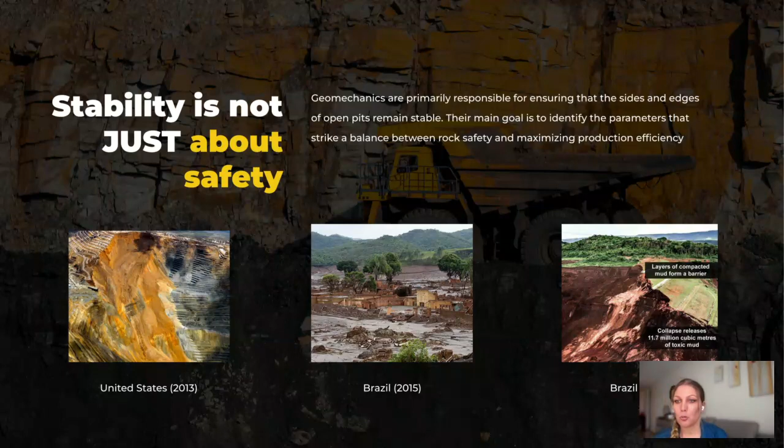Basically, the stress in the soil that makes up the slope depends on how heavy the rocks are, and anything else like buildings or machines sitting on the side of the slope.

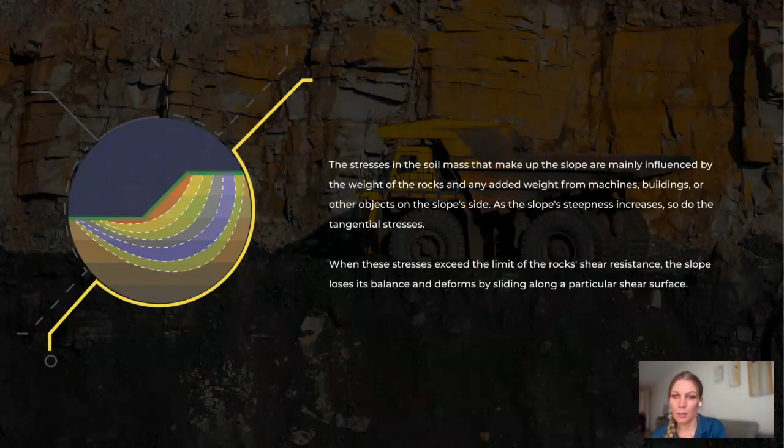When the slope gets steeper, the tangential stresses go up, and if they go too high and exceed the shear resistance limit of the rocks, then the slope goes out of balance and slides along the specific surface.

So when the height of the ledge increases, we need to make sure the slope stays stable by reducing the angle of inclination.

The slope height and angle are affected by natural factors like how strong the rocks are, how fractured and layered they are, the orientation of cracks and layers in relation to the slope, as well as other things like groundwater level and technological factors.

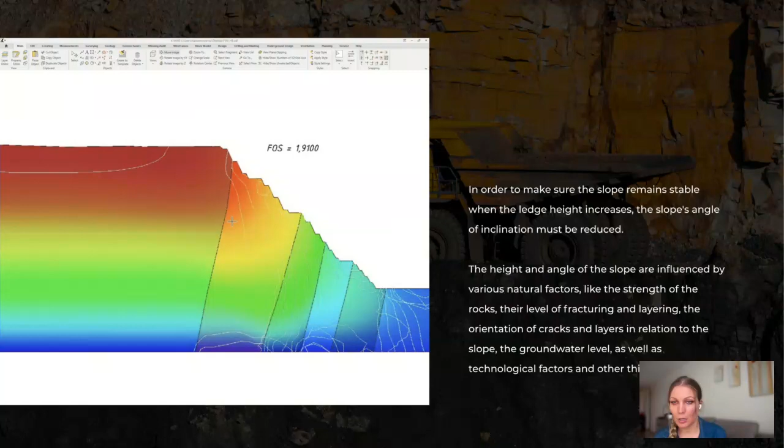That's why we need to do geotechnical surveys to assess the stability of existing slopes and calculate laying angles for planned objects. Even though the rocks can be complex and hard to work with, we can still calculate the slope elements with minimal errors.

When we determine stability, the composition of rocks that make up the sides is what is most important. If the rocks are homogeneous and possess constant physical and mechanical properties, we can use analytical dependencies to evaluate stability.

However, if the sides of the pits are made up of layered rocks of varying thicknesses and orientation to the horizontal plane, and atmospheric precipitation affects the physical and mechanical properties of the rock mass, along with the additional load from heavy mining and transport equipment, then the calculation models become much more complicated.

In these scenarios, closed analytical dependencies are no longer applicable, and researchers must turn to numerical or digital models to assess the stress-strain state of pits and dumps with various shapes and compositions.

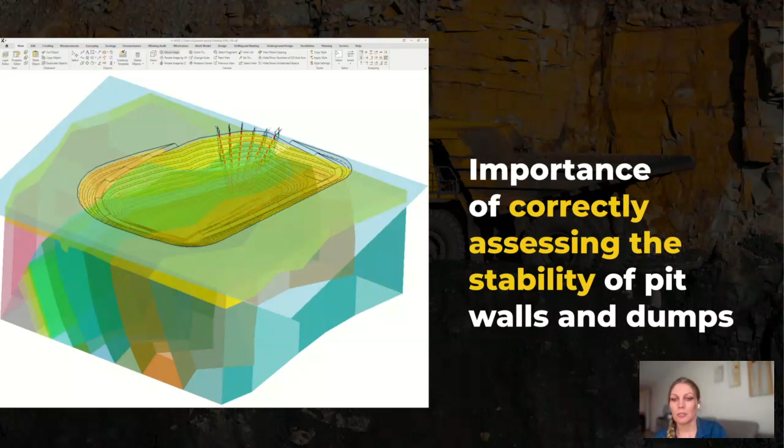These numerical models allow us to evaluate pits and dumps composed of rocks with arbitrary structures and variable physical and mechanical properties. As far as K-Mine software, our tools allow users to manage rock masses, helping them tackle complex issues such as calculating stability or deformation in open pits.

Geomechanics in general is a multidisciplinary field, as it includes mechanics of deformable medium, geology, hydrogeology, geotectonics, engineering geology, and seismic events impact. In mining geomechanics, we utilize various methods to determine slope stability by computing the stability coefficient.

One of the useful tools in identifying the sliding surface present within the structure is the theory of limit equilibrium, as it allows us to ensure safe and stable mining operations.

Holding and shearing forces also play a significant role in geomechanics, as we address them through the application of algebraic addition or polygonal forces techniques. These methods enable us to deal with challenging rock mass management issues and maintain the stability of mining operations.

We utilize various methods to determine the slope stability factor while also creating graphical representations of prisms that may collapse. To get started, we require some initial information such as physical, mechanical, and strength properties of the rocks in the area of interest, the structure of the ledges located at different elevations, and the calculation area boundary.

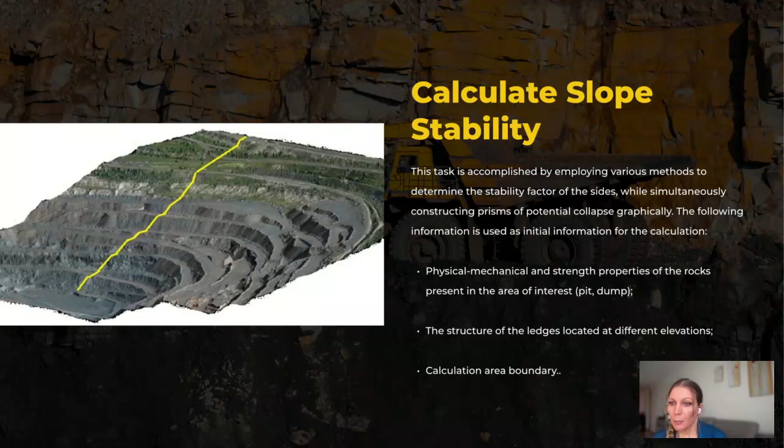So let's talk about each of these methods in detail. The method of algebraic addition of forces involves graphically displaying prisms of possible collapse that help us determine whether a slope is safe or not.

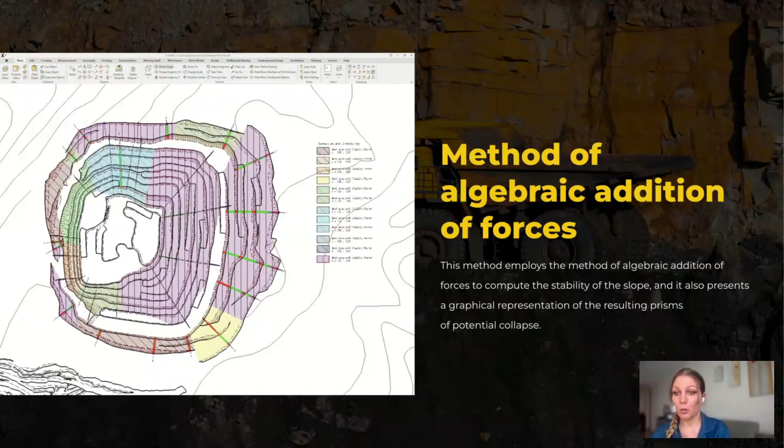To use this method, we need to specify or select the physical and mechanical properties of the rocks, and then divide the calculated prisms of potential collapse into a number of smaller prisms. Additionally, we can utilize the filter that takes into account seismicity by enabling the appropriate flag.

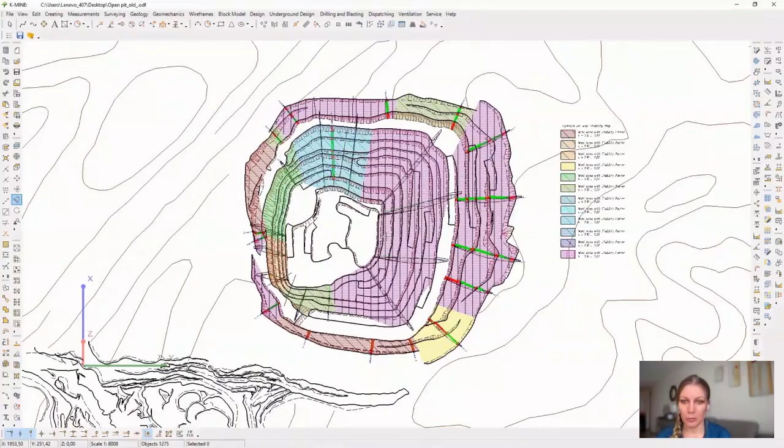In addition to the safety factor, we can also calculate the slope angle for a given stability factor. This information is incredibly valuable because it allows us to design and implement slope stabilization measures that are effective and efficient.

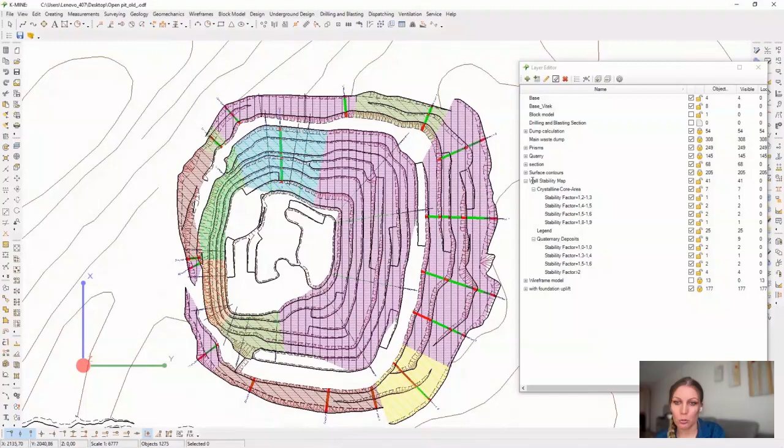Overall, the algebraic addition of forces method is an essential tool in the field of slope stability analysis because it provides us with valuable insights into slope stability as well as ease of use, making it a crucial technique for anyone involved in mining projects.

Next method is the calculation method with foundation uplift, and it's used to determine the stability of slopes in areas such as dump sites or tiers, taking into account holding and shear forces caused by foundation uplift and plantar deformation from a weak foundation of high power.

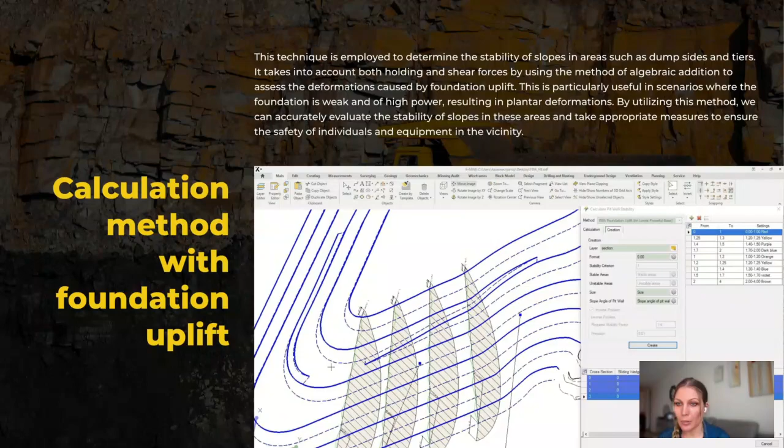The calculation of stability starts with the search of the most stressed sliding surface in the rock area. Then an iterative construction is carried out from the minimum possible sliding prisms that are limited by the sliding surface, approximated by 3 arcs of circles.

To perform calculations using this method, we need to enter rock properties for the foundation and the upper layer separately by selecting the Set button in the corresponding calculation field. Then the calculation is performed using 2 selected polylines drawn along the normal to the analyzed slope.

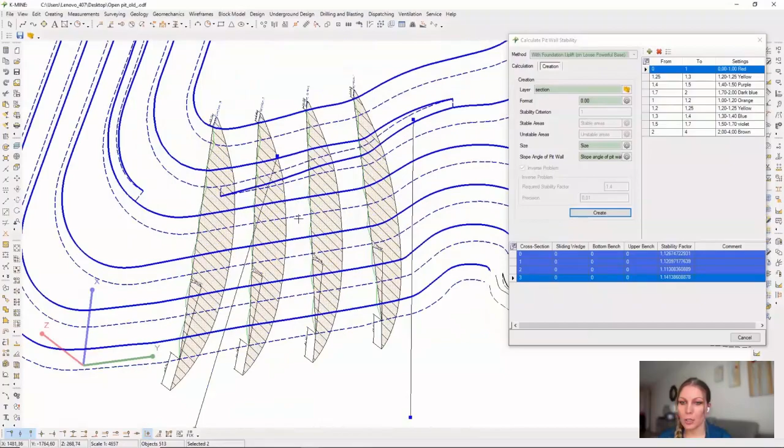The result obtained while calculating slopes on a weak foundation covers only the slope from the first lower edge, which is basically the boundary of the rocks of the weak foundation by default, to the last upper edge that intersects the calculated profiles represented by a polyline.

This method is incredibly useful in accurately assessing the stability of slopes and ensuring the safety of individuals and equipment in this area.

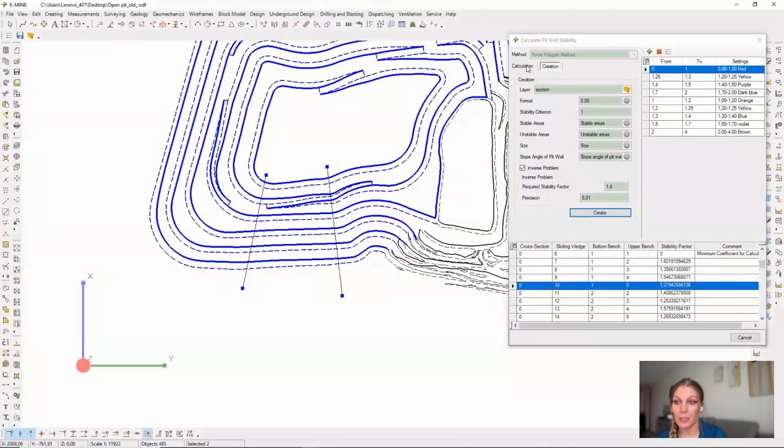The next method is the force polygon method, and it's another way to calculate stability in a homogeneous area by taking into account shearing and holding forces through vector addition.

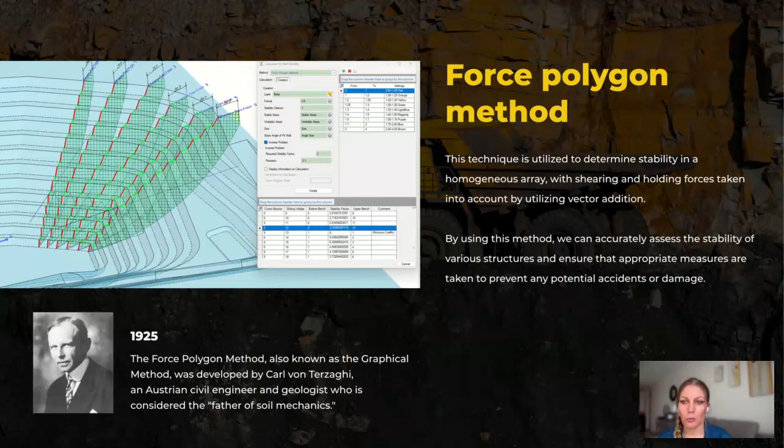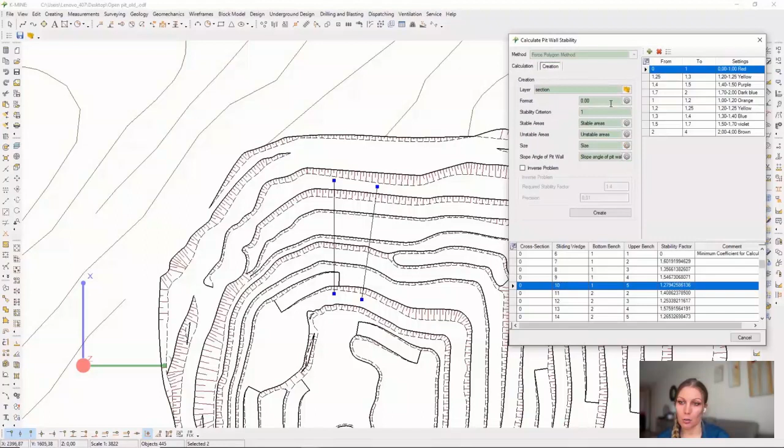Once you choose this method, you need to enter data about physical, mechanical, and strength properties of rocks, similar to algebraic addition of forces. Apart from typical stability calculation, this technique considers hydrostatic weighing under watered slope conditions for dispersed unbound rocks. To account for hydrostatic weighing in the calculations, we have to indicate the layer in which hydroisohypses of the groundwater level are located in the upper boundary of the aquifer field.

This method is very helpful in assessing the stability of various structures and ensuring the safety in mining projects. It's essential to use this method to avoid potential accidents and damages that occur due to unstable structures.

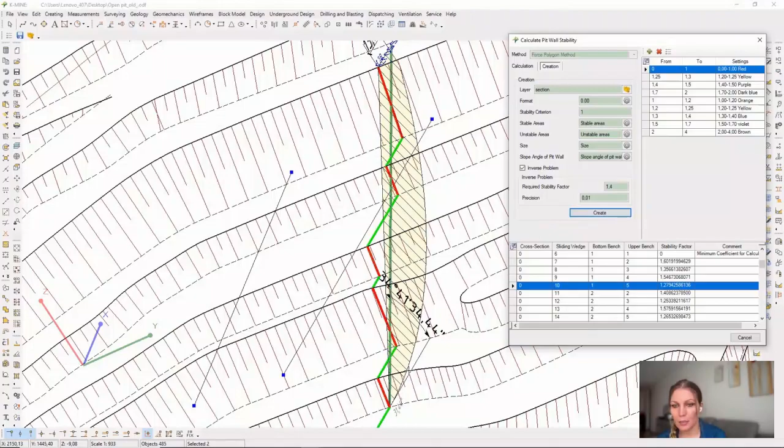The next method is the force polygon method in anisotropic medium, and it's a tool that is used to calculate the stability of a heterogeneous massif, which takes into account the shearing and holding forces by using the vector addition of forces.

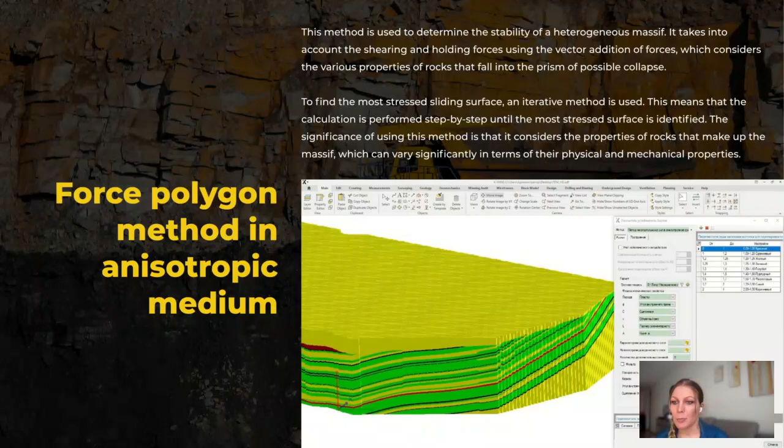This method considers various properties of the rock that fall into the prism of possible collapse, and the search for the most stressed sliding surface is carried out by an iterative method.

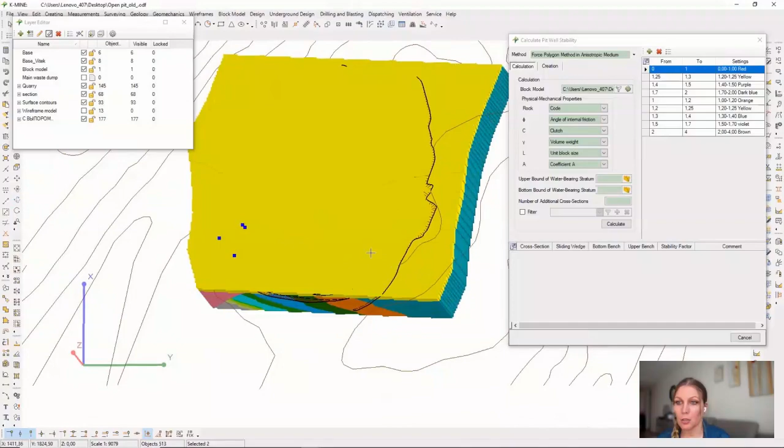What distinguishes this method from calculating stability in a homogeneous massif is that the rock properties needed for the calculation are automatically extracted from the block model, which is entered during its creation.

Furthermore, taking into account seismic impact, water slope, and the presence of weakening surface is done in a similar way to the polygon of forces method in a homogeneous medium. The construction, output of information about calculation, and calculation of the inverse problem are performed similarly to the polygon force method in a homogeneous medium.

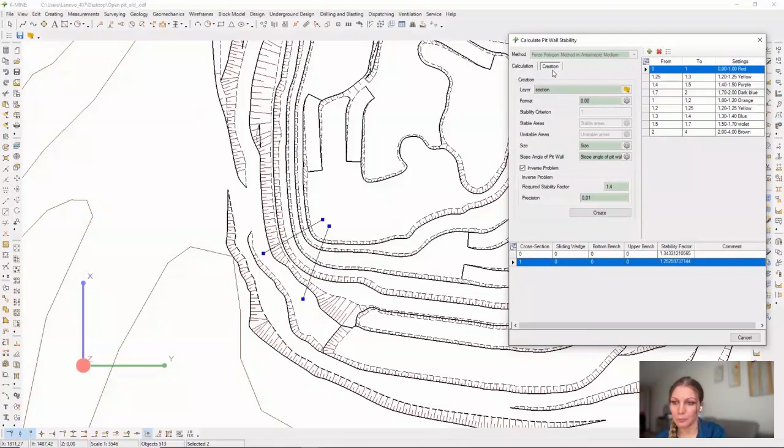And the last method is the task calculate FEM stability, which stands for finite element method. It's used to determine the stability factor and stress strain state of slopes, pit walls, and dumps.

This command makes use of the finite element method, which is a numerical technique that involves dividing the area under analysis into a finite number of sub-areas or elements. This helps in carrying out an elastoplastic calculation. To determine the slope stability factor, we use the strength reduction method, which involves finding a stable solution to the problem while simultaneously reducing the strength

characteristics of the rocks in the massif. So in order to begin the task of calculating FEM stability, it is necessary to construct a geological section using a surface object with a double fill and build polylined objects to act as boundary conditions.

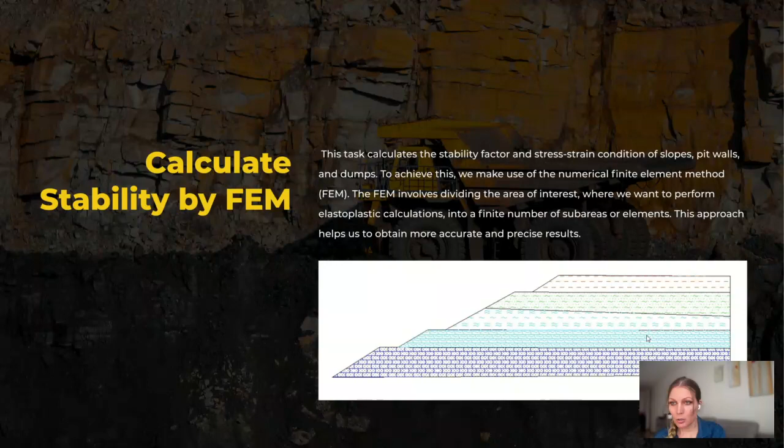So now we can explore the geomechanics model in K-mine in a more practical context. Our objective is to optimize the angle of inclination of pit wall to achieve an economic benefit. So to start, we'll determine the current stability coefficient and then proceed to optimize it.

First of all, we make use of the initial design coordinates of a conditional open pit, as well as the framework of the open pit and the rock formations that contain the mineral deposit.

The stability calculation, which utilizes FEM, is performed section by section. This allows us to utilize the create section tasks to obtain a slope section that takes into account the mining location and the rock formations.

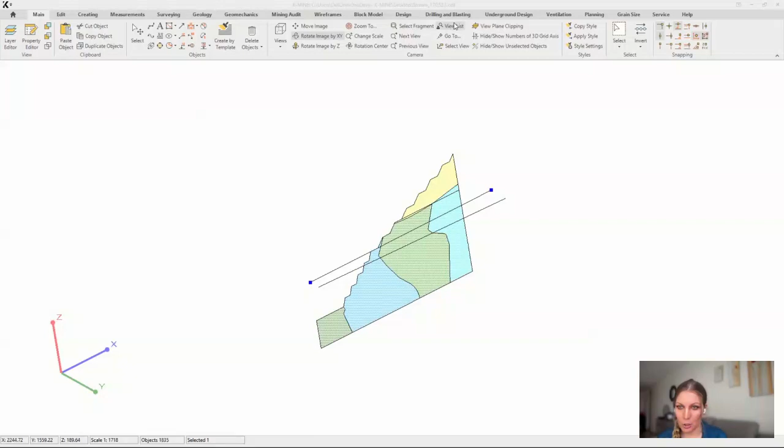We trim the superfluous portions of the sections and switch to the working view. And then we initiate the FEM stability calculation task.

Subsequently, in the task menu, we should upload the rock list, define their characteristics, and establish the association between the surfaces on the section and the rocks mentioned in the list.

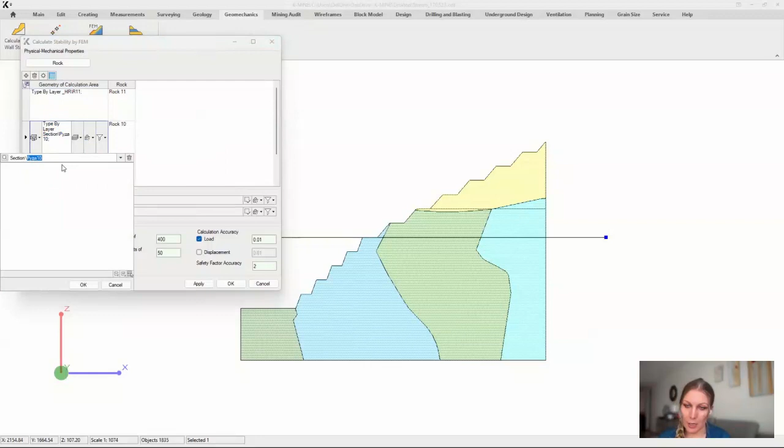Now let's talk about the limiting factors that we need to consider. Once we've taken those into account, the next step is to create a grid of a certain size, determine the number of iterations, and set the required accuracy. After that, all we have to do is hit the apply button, which within a few seconds will have our results.

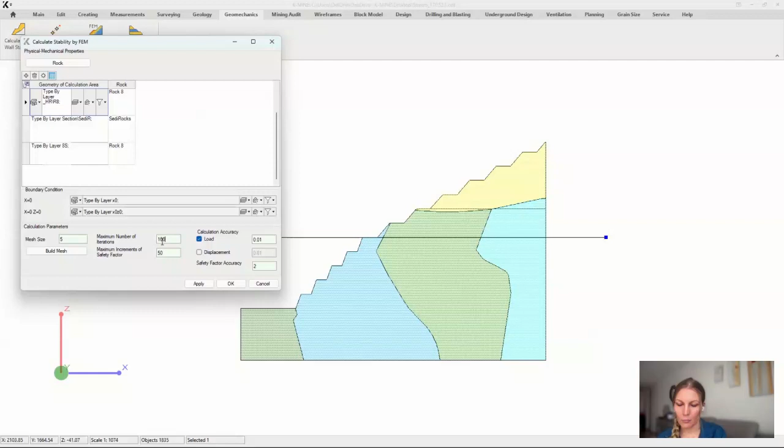So each result we get comes with its own stability map, which has its own legend and stability factor. Let's look at the results we obtained so far.

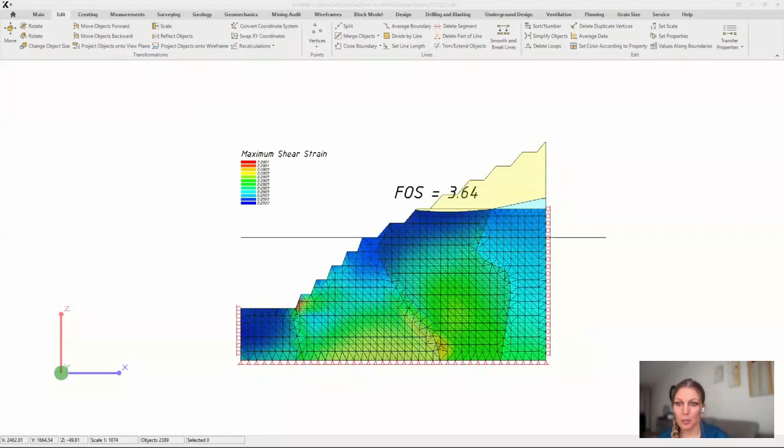To perform the task, we need to do it in two stages. First, for the stable rocks, and then for the weak overburden.

Now let's perform a comparable calculation for the overburden. With some parameter reconfiguration, we can easily run the calculation again.

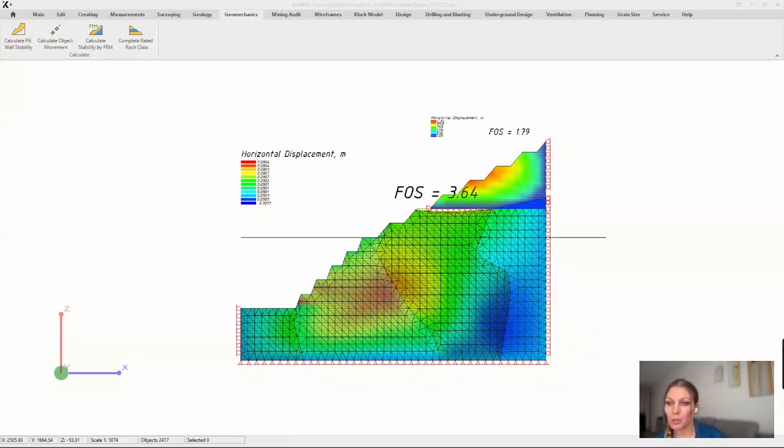The stability factor for the overburden is 1.79, indicating that this section is not extremely stable. While the coefficient is considered normal, there is no need to reduce it at this time. However, we can optimize the factor of 3.64 for the rock formations, which presents an opportunity for improvement.

To achieve this, we can utilize the calculate slope stability task for our section. We'll pick the prism that connects the zeroth and sixth ledges from the result list, and then we'll input the required safety factor, like 2.7, in the required stability factor field and run the calculation.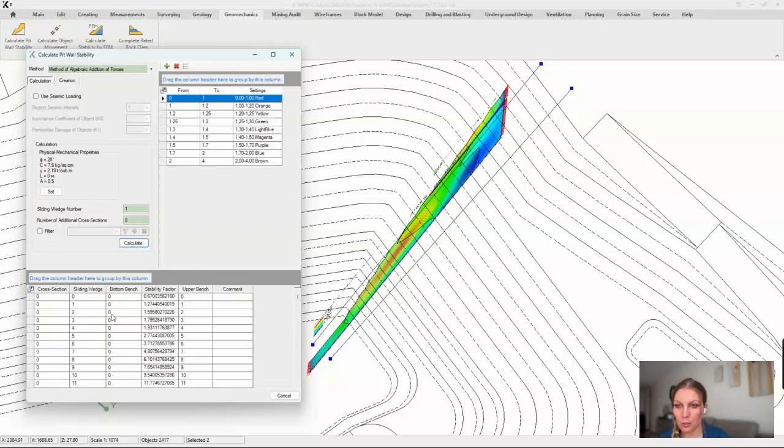Using this approach, we arrived at a stability factor of 3.7, which closely matches the factor derived from the FEM method.

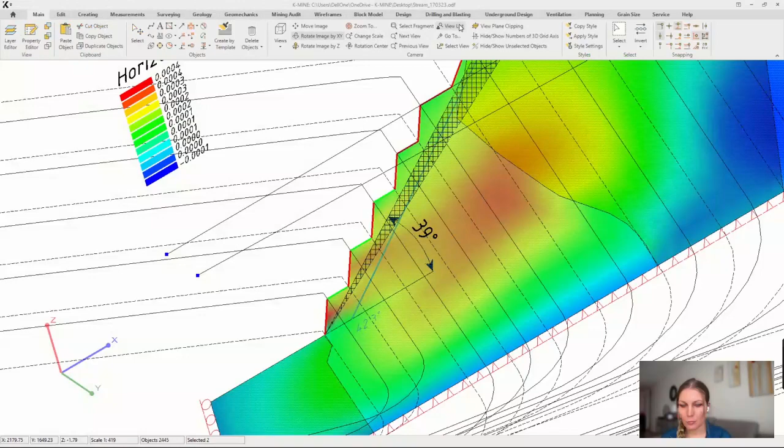So additionally, a prism that could potentially collapse has emerged on the section along with the slope angle of the pit wall that achieves a stability factor of 2.7.

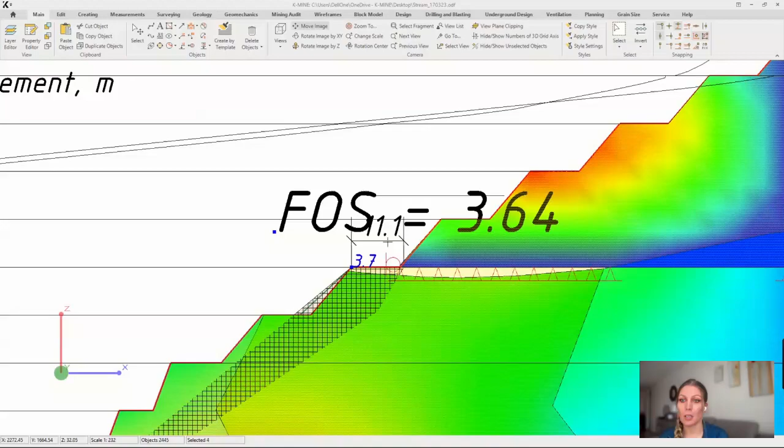In our specific case, this angle is 42.3 degrees, and we can incorporate this angle into our design to observe any resulting differences in the outcome.

In the process of optimizing the resulting pit slope, we need to pay close attention and make the final decisions only after we consider all the factors. It's crucial to have complete confidence in the incoming information and calculations to avoid any mistakes and risks associated with destabilization of the mountain range.

Now let's move on to the topic at hand. We'll examine how slight changes of the resulting pit angle can affect a small iron ore pit. We'll create different scenarios in the pit optimizer model to illustrate this.

It's one of our other models, and it's essential to understand the significance of these changes and the potential impact on the outcome. Therefore, it's essential to approach this process with caution and care while taking all necessary steps to make informed decisions. We always have to understand the risks and potential benefits associated with the process of optimizing the pit slope.

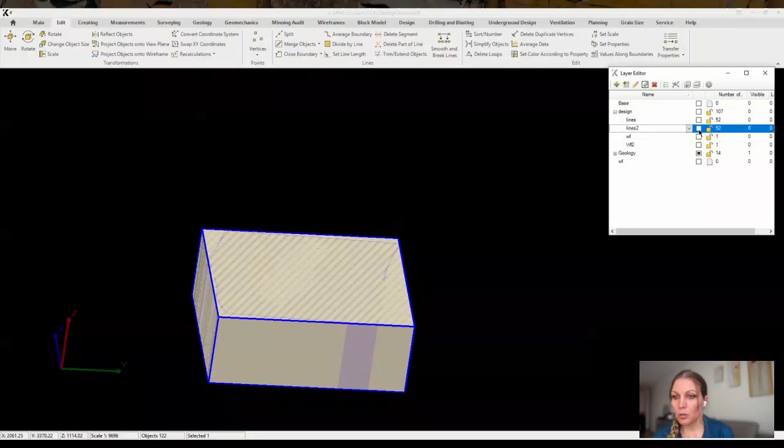So in order to develop a project to search for optimal contours, we require a block model and the current mining position in the pit.

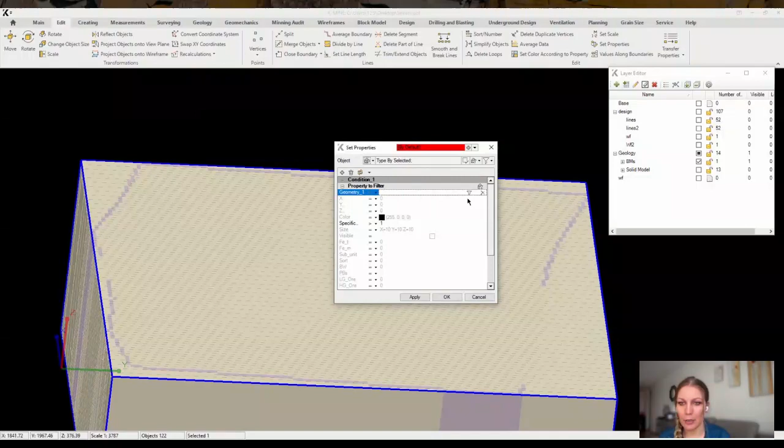However, to consider the present state of mining operations during the optimization process, we must restrict the block model to a wireframe before incorporating it into a project. To achieve this, we utilize the set property command and choose the appropriate geometric constraints.

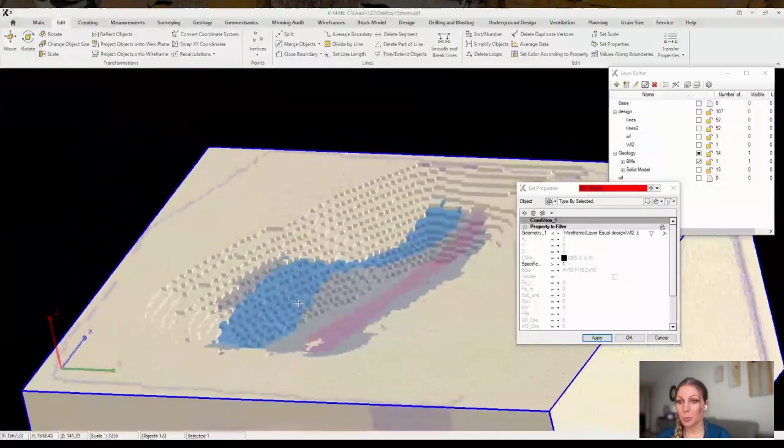Now the block model is prepared and shown blocks correspond to the constrained surface. We can confirm this by exhibiting the surface as a wireframe or lines.

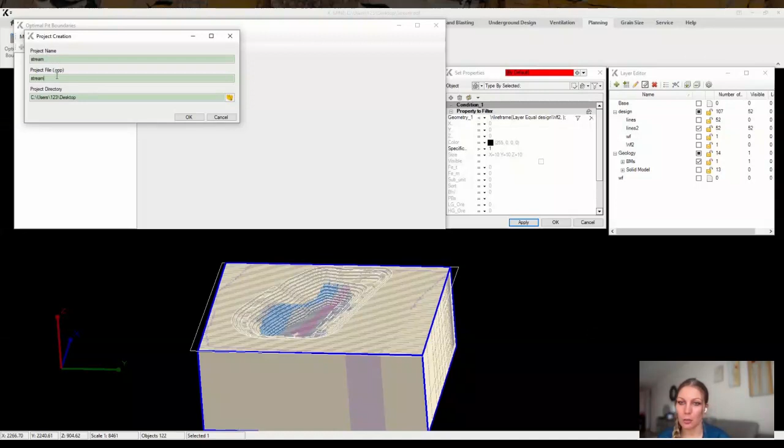To initiate the project creation process, access the optimal pit boundaries command and complete the primary fields. These fields include the project name and the location where it will be saved on the local computer.

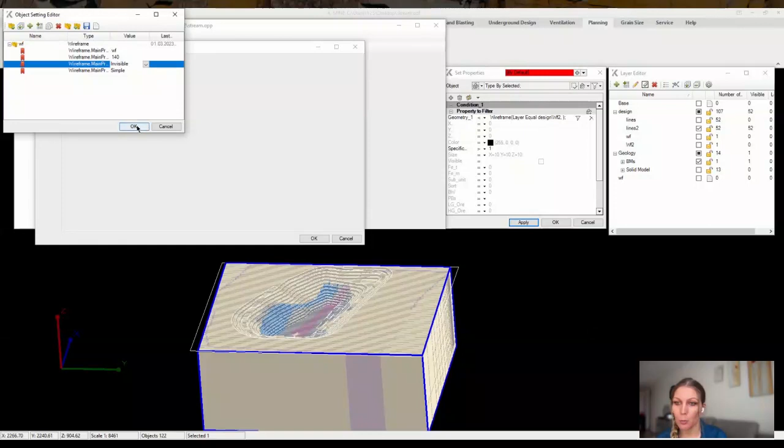And to make the information more readable, we'll configure the display of calculation results to present values in millions and with a single decimal point. Additionally, we'll set up the wireframe settings while leaving the horizon settings unchanged, as they won't be necessary for today's example.

So now we'll incorporate a restricted block model into the project. On the Properties tab, we'll indicate the fields that we'll use later on, such as quality indicators and material class attributes. For all other data, we fill them in manually.

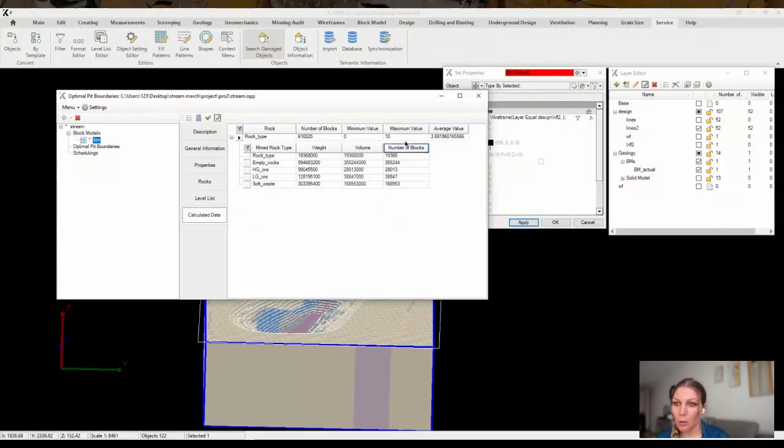Afterward, let's input the specific weights for the block model rocks and include valuable components for each of the mineral types.

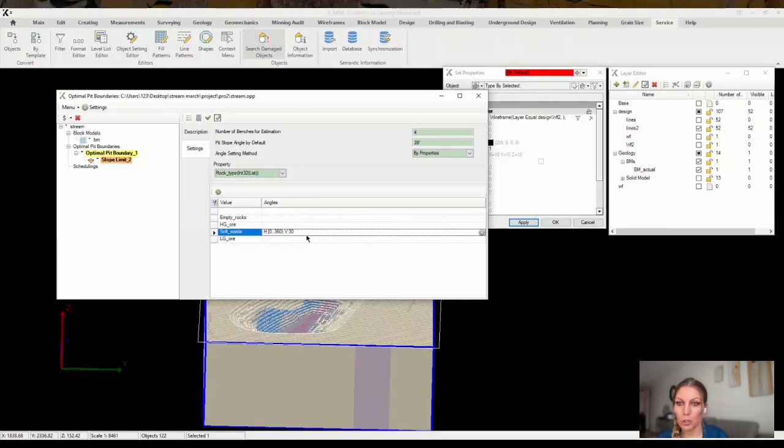We'll also create a subdirectory in the project tree and choose the relevant block model for further use. Keep in mind that although multiple block models can be utilized in the project, only one can be involved in the calculation at a time.

Next, we'll configure the indicators for the resulting pit angles. For rocks, we'll use 39 degrees, and for soft rocks, 30 degrees. These angles can be defined by filling in two fields: the default field and the angle of inclination for soft rocks from the material class attribute.

The next step is to determine the economic indicators. To conduct a more comprehensive analysis of the output data, we'll establish a price adjustment coefficient step of 0.02 within the range. This setup will enable us to observe all changes for analysis purposes.

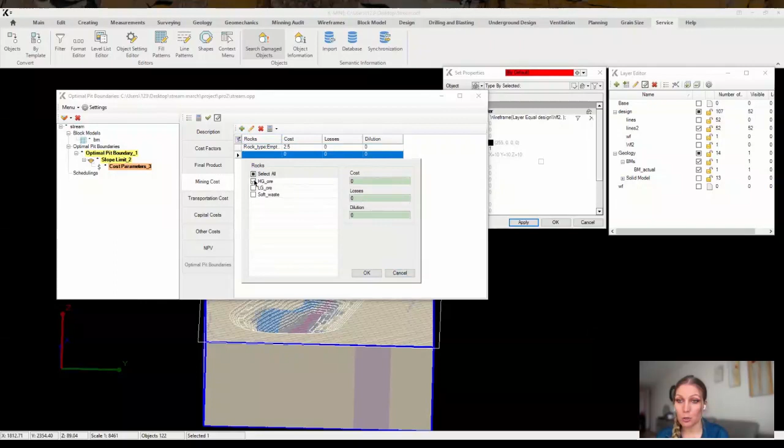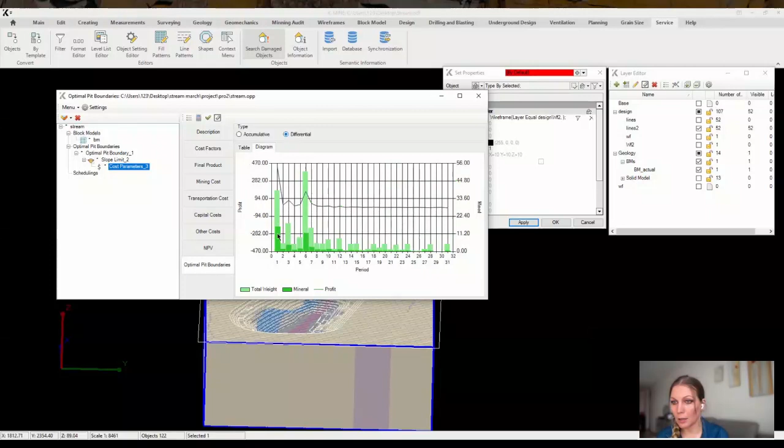Let's assume we're mining iron ore, and we'll use it to produce a concentrate and then high quality direct reduction pellets, each worth $150. To set the cost of enrichment, we'll use a value of $12, and the cutoff grade will be 12.5 and above. The last step is to input the recovery factors, which we'll set at 0.38 and 0.3 for high and low quality ore respectively.

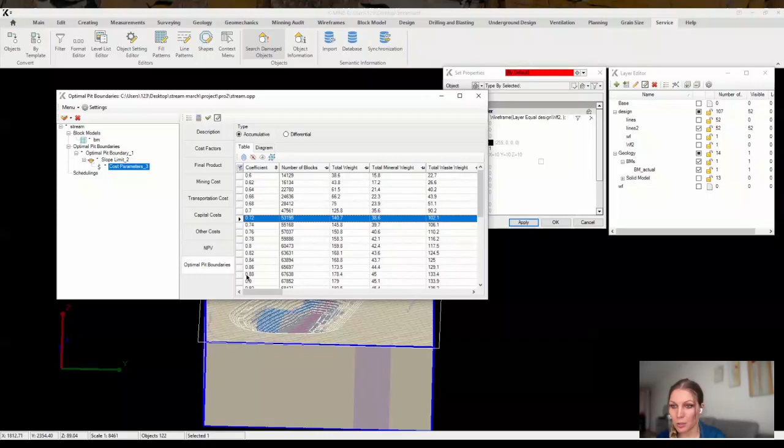We proceed to the mining cost step and establish the excavation cost for each of the rock groups: empty rocks, ore, and soft waste. Since transportation costs aren't pertinent in our current analysis, we'll use a fixed value of $2 per ton.

To compute NPV, we'll need to set the discount factor and annual productivity. So let's begin the calculation, which will take only a few seconds.

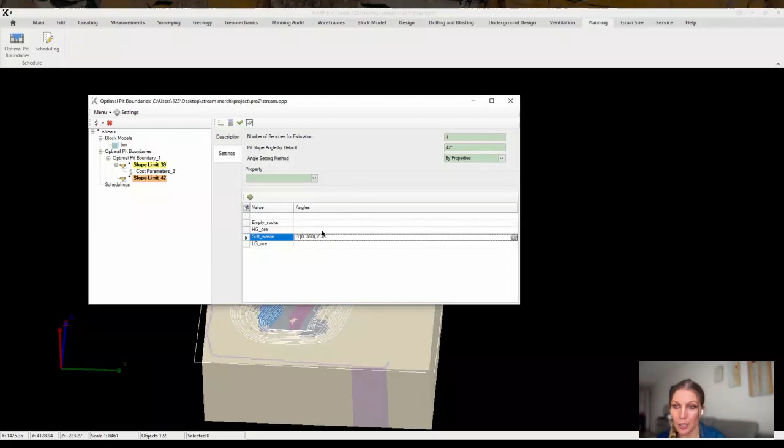And there we have it, the results are in. To make it easier to understand the data, let's navigate to the chart tab and change the data display mode to differential. From this, we can infer that there isn't a substantial increase in minerals after the 7th coefficient. Thus, we can select this price adjustment coefficient for comparison with future calculations.

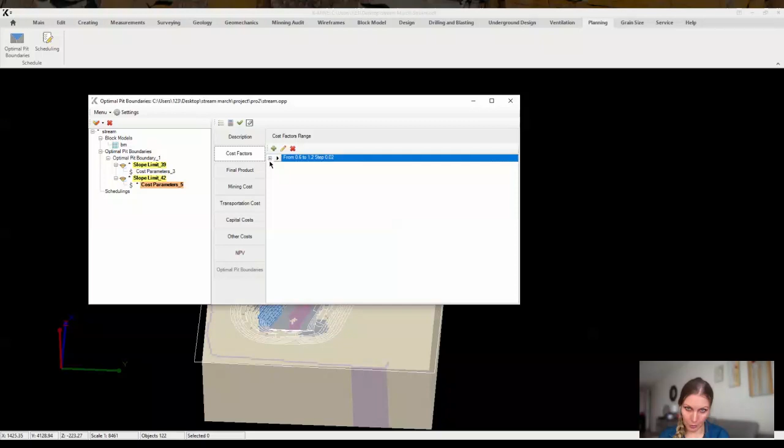Let's create a similar scenario with a slight variation. This time we'll choose an angle of 42 degrees as the resulting angle of the pit for rocks and leave all other settings unchanged. To make a reliable comparison, it's essential to repeat all the scenario settings accurately, so we should aim to compare apples to apples and avoid matching several scenarios with variation in several data points.

However, in some cases, changing several initial data points can also be useful for comparison. For example, if there is a change in production technology where all parameters associated with a final product change, such as the cost of the product, the cost of enrichment, and the yield of the final product, and so on.

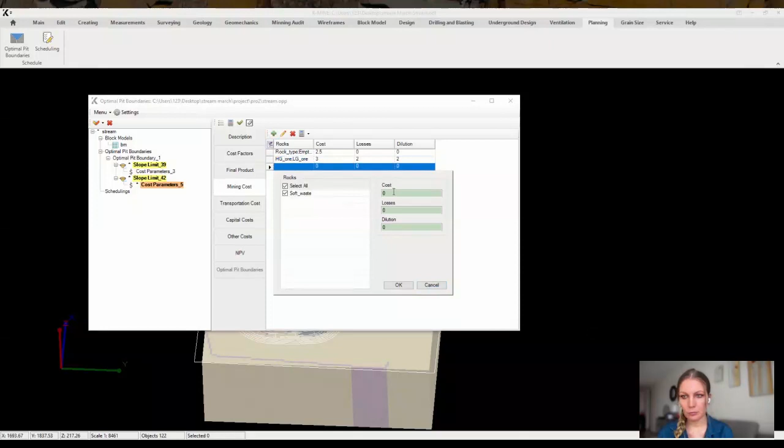So once the calculation is finished, we'll review these results in the same manner as the previous scenario.

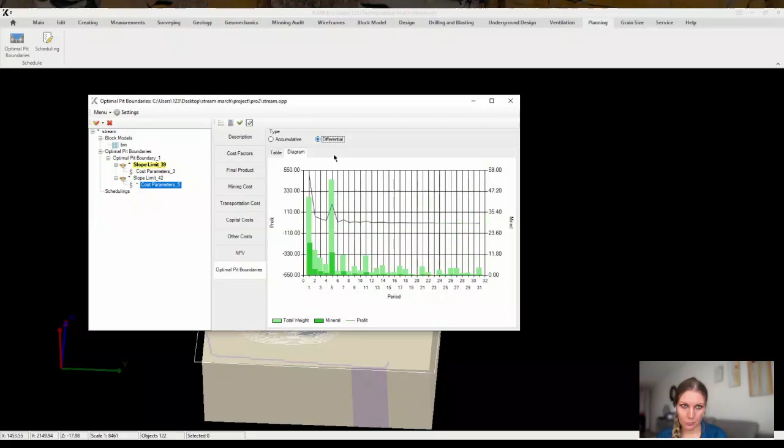However, the differential graph presents a slightly different pattern. For a specified pit wall inclination angle, a distinct coefficient will be optimal, and we will choose it as number 5, which is 0.68, and compare it with the coefficient of 0.72.

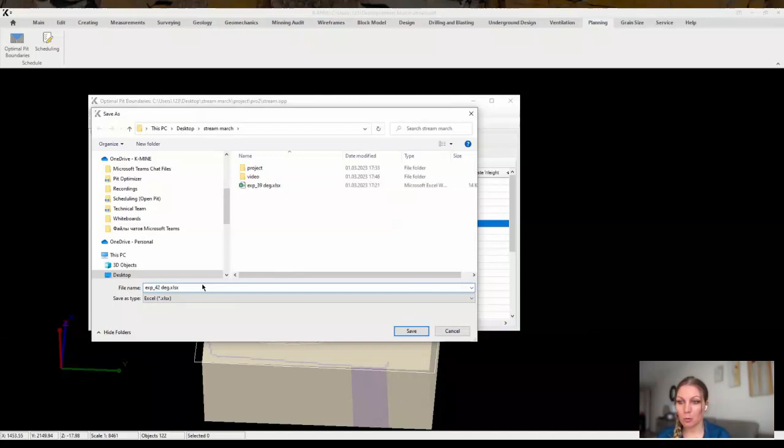In advance, we can also conclude that the increase in the angle has optimized the shell. This means that the same quantity of ore can be extracted with less overburden, and with the same price adjustment factor of 0.72, we obtain more ore. However, we'll delve into numbers later. We'll export data from the resulting tables to Excel for a more comprehensive analysis.

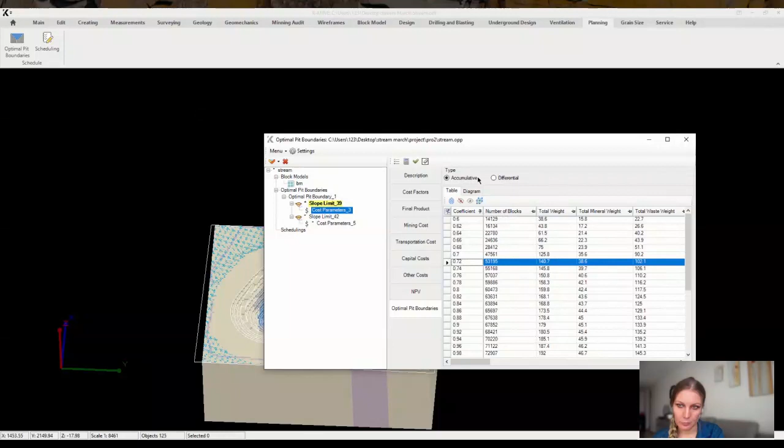So let's create wireframes based on the scenario and coefficients we're interested in. We'll assign different colors to them to make things more clear.

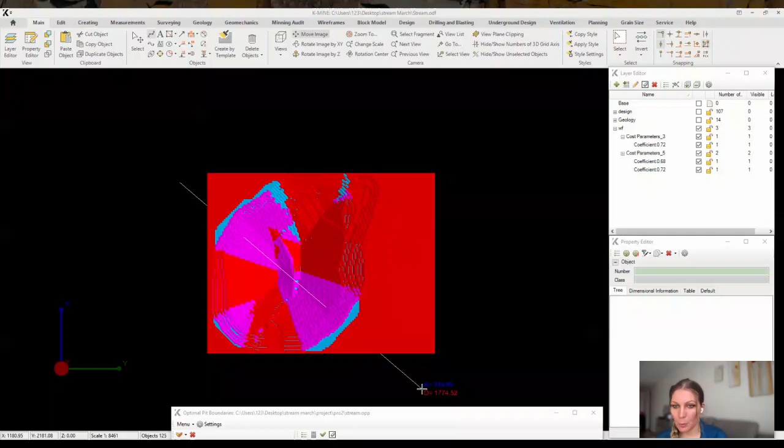First, we'll use the color red for the wireframe that represents an angle of 39 degrees and coefficient of 0.72. Next, we'll use purple for the wireframe representing an angle of 42 degrees and coefficient of 0.68. And finally, we'll use blue for the wireframe representing a pit angle of 42 degrees and coefficient of 0.72.

Assigning different colors to each wireframe will help us distinguish them from one another and make it easier for us to analyze the results.

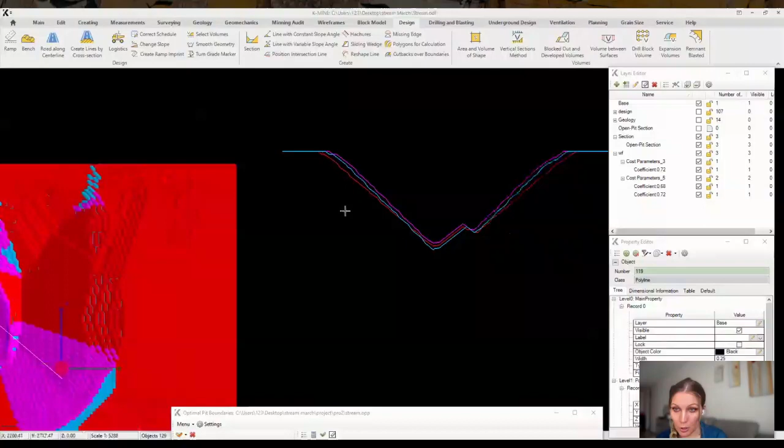So next we'll attempt to examine the distinctions between the shells we've obtained in the sections. To do that, we'll construct a section along the guideline and only exhibit the intersections of the wireframe and the guide.

So let's take a closer look at the cross-section. Initial observation revealed that when the pit wall has the smallest inclination angle, a larger quantity of both soft and hard overburden is extracted, which is expected.

For an inclination angle of 42 degrees, shells with coefficient 0.72 and 0.68 are nearly parallel. However, the shell with a coefficient of 0.72 is deeper throughout the gap, indicating that more rocks will be extracted, which is also logical.

Nevertheless, the key issue remains with the numerical expression of these indicators. Even minor discrepancies over broad areas may result in significant variations in volume.

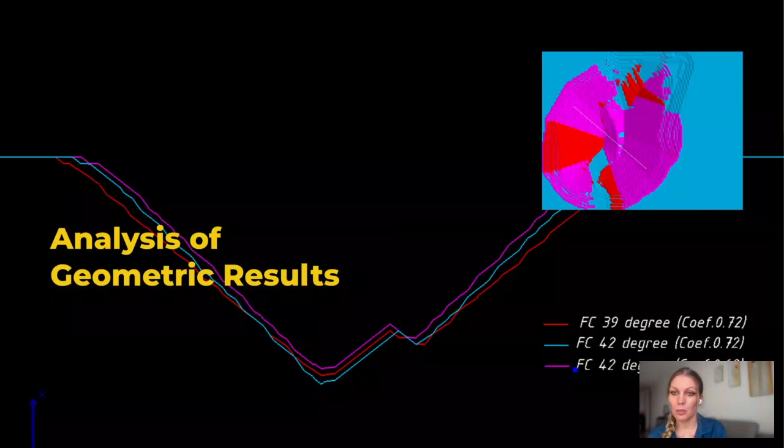Consequently, choosing the optimal contour should be done carefully, taking into consideration all the factors that are relevant to the user. The question of which contour is best to adopt can only be determined by the numbers. Let's dive into the numbers and see what they have to say. This is usually the stage where we get the most answers.

First, we're going to compare the two options with an angle of 42 degrees to the initial option we accepted as the main one, which is 39 degrees and a price adjustment coefficient of 0.72. We're going to split the comparisons into two parts: economic indicators and indicators of the export of rock mass, which are directly related to each other.

Let's start by looking at the export of rock mass. The option with the steeper slope angle removes 12 million tons more rock mass than the option with the angle of 39 degrees. The ore is also 3 million tons more, and the overburden is 9 million tons more. The stripping ratio for the increment in ore overburden is 3 tons per ton, which is not very attractive, especially given that the total stripping ratio for the deposit is up to 2.55 tons per ton. So we need to pay attention to the adjustment factors with a lower value, and we'll compare it as a second option.

So now let's focus on the economic indicators. More rock mass means more cost for its removal and processing, which is $88 million more, which is 8%. However, there is also an increase in profit of $60 million, which is 7%, and an increase in NPV of about $11 million, which is 3%. As a percentage, these costs are still higher. And considering the result of financial activity for a long period, we can't ignore the discounted income, but its increase is not significant.

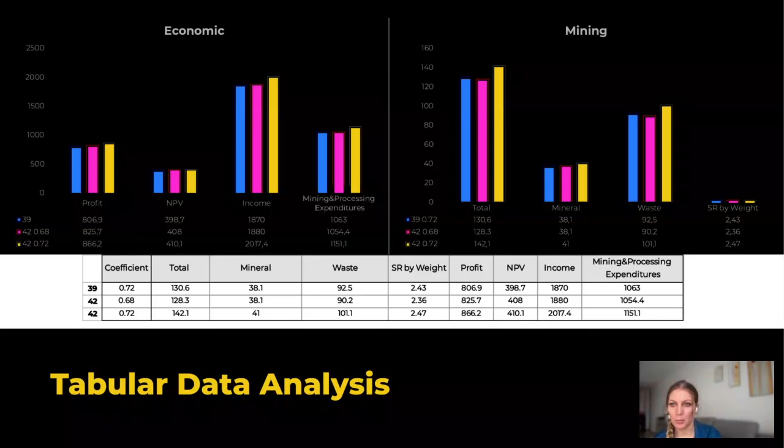So when it comes to optimizing the pit wall slope, there is also a need for caution. On one hand, we want to minimize the cost, optimize pit parameters, and reduce the cost of finished products. On the other hand, we need to avoid irreparable losses that can be caused by wrong calculations or incomplete understanding of rock occurrence conditions. These losses can lead to the suspension of pit operations, freezing the entire pit, and even loss of equipment and loss of personnel. So safety should always be the top priority, and the margins of safety should be respected and never violated.

There's a joke that suggests the pit should collapse the day after equipment and personnel are removed, to allow for the maximum possible angle of inclination of the pit wall. But of course, we don't want to bring our mine to such a state.

So what if tomorrow the price of finished product increases, giving new prospects for development of the field? The global trend shows that prices are rising because resources are being depleted, so we can predict that very accurately.

Now, looking at our illustrative example of optimizing the resulting angle of inclination of the pit wall, we can conclude that even a slight change in this indicator can have a significant impact on the volume of rock excavation. In our case, increasing the angle by 3 degrees allowed us to reduce cost by minimizing the excavation of overburden, which is 2.5 million tons less, and obtain the same volume of minerals. It also enabled us to extract more minerals and extend the life of the pit and the enterprise as a whole, an additional 3 million tons of ore.